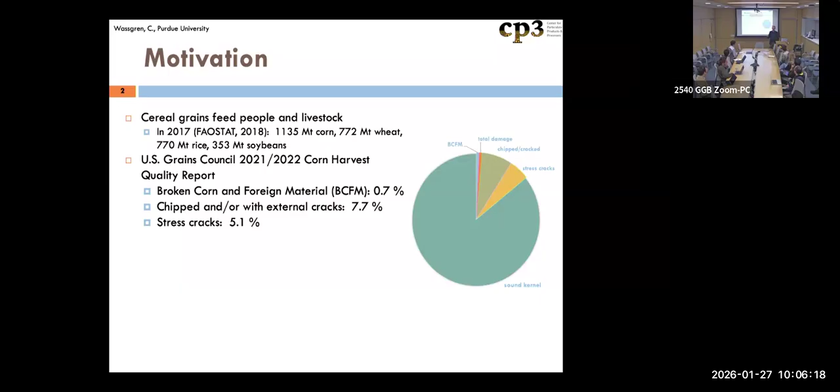I can show you a picture of that. The picture on the bottom left is this external damage, chipped or with external cracks. What you're seeing here is a dye that reacts with starch, the exposed starch of the corn kernel. Everywhere you see this blue color in the image, that's where there's some exposure to the atmosphere or to the dye. So a lot of it gets chipped or externally cracked, and then you have internal stress cracks at about 5%.

That's shown here in this image. It's a little hard to see, but the picture is backlit, and you see a change in color where these red lines encircle it - that's an internal stress crack. Over here, this is more of an XRCT image, and you see these kind of voids inside - those are also internal cracks.

When you get these internal cracks, about 15% of the material gets damaged. When you get this kind of damage, it degrades the value of the corn, affecting the price the farmer will get for that material, so they find it undesirable. It also opens up the corn to degradation - you can get microbial damage, it gets inside there and causes damage. It can also affect water absorption with the kernels, which affects downstream processing as well. So it's very undesirable to have these cracks form in the corn.

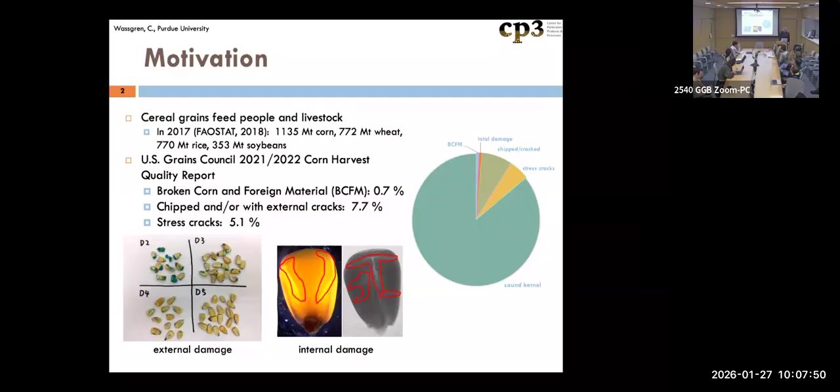So we want to try to avoid that. Now, the things that cause this kind of damage - there are several sources. One is drying: when you dry the material, the transport of moisture from inside the kernel to the outside, to be evaporated away, can cause damage to the kernels. There can also be some infestation, microbial damage that can occur.

But another source of damage is mechanical damage. As you're collecting that material during harvest, like in a combine harvester - these are multi-million-dollar devices, a dream for mechanical engineers, with all kinds of moving parts, conveyor belts, spinning blades, and things like that - they impact and compress the kernels, which can cause some damage during that harvesting process.

And then once you have the material and you're handling it later, you have all these various kinds of conveyors that can cause additional damage, like drag or flight conveyors, bucket elevators, material just free falling onto surfaces - lots of places where material can be compressed, impacted, and possibly worn. So these are the kinds of things we're interested in studying here, specifically parts inside a combine harvester, since a lot of these applications occur inside these things. So we wanted to study this problem.

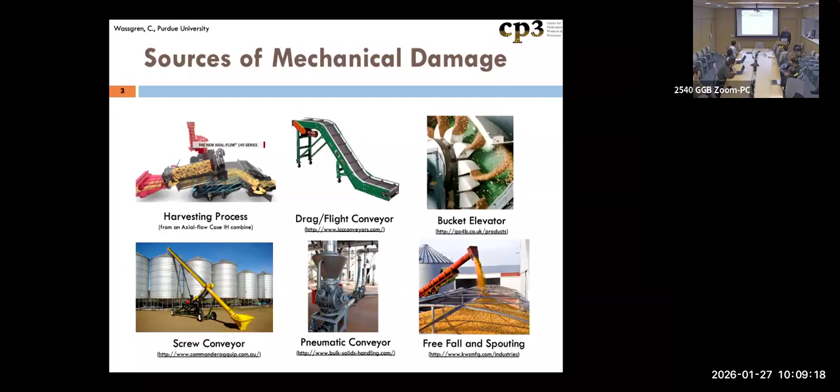We made use of the discrete element method to do this. It's very well suited for this kind of application. I think many of you know what DEM is all about.

Does anyone here not know what DEM is? Okay, nobody's going to speak up if they don't know.

I won't spend a lot of time on this, but it's a pretty straightforward modeling method in terms of the general approach. We model the movement of individual particles by finding the loads acting on each and every particle. We use Newton's second law to determine the translational and rotational accelerations on those particles, integrate that in time, make whatever predictions we're interested in within the simulation, and then repeat that process over and over again for as many particles as we can, as fast as we can. So in concept, it's relatively straightforward.

There are challenges, though. A big challenge is getting accurate models, and when I say accurate, I mean accurate enough for your application. A lot of people don't keep that in mind, but when you develop models, you really want a model that does something well enough for what you're interested in. It doesn't have to do everything for everybody, just enough for your purposes and what's considered accurate enough for your purpose.

So developing those models can involve modeling the particle shape, the size distribution, the forces involved, contact forces, whatever it is. All those things are embedded in these steps, and then you perform this as quickly as possible for as many particles as you can, typically.

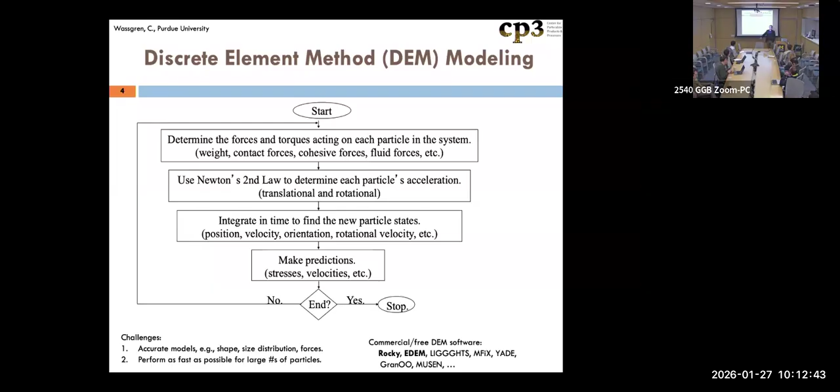So there are pros and cons, but anyway, that's the software we're using. I'll talk in the next several slides about the models we use before we get into the damage modeling aspects. The first thing to consider is what kind of particles are you going to use. We're interested in modeling corn kernels, so not spheres.

We can easily measure the general size and mass of corn kernels. Moisture content is another thing we measure. It turns out when you're dealing with biological materials, moisture content is very important, it affects all the mechanical properties of the particles, so you need to know that.

But to get the shape and size, we simply imaged a bunch of corn kernels using XRCT, X-ray computed tomography, to get a nice outline of the kernels. That way you could measure many kernels and get different shapes and sizes. We tried some 3D scanning of kernels, but didn't have much luck just trying to image the surfaces. They were too reflective, the pericarp, which is the surface of the kernel, was pretty reflective, so we got really bad images with normal 3D scanning. We tried spray painting it and all this kind of stuff, and it just didn't work.

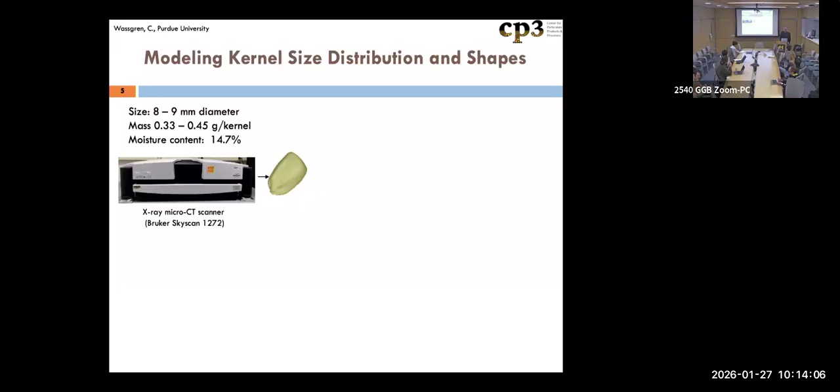And then to kind of zero in on which set of shapes we wanted, we actually just looked at the error in the volume of the actual kernels, and then we looked at the envelope volume of the bonded spheres, and we tried to keep that more or less the same. And also the shape of the sphere was kind of set by the shape of the kernel.

And we found that 4 to 5 spheres seems to minimize the error. We could go to a larger number of spheres, but it takes more computational effort. So this is an engineering trade-off, right? We do this all the time when you develop models. How complex do you want it to be? What restrictions do you have? Speed is a restriction, so we don't want to go out to 100 different spheres—it just would take too long to model big systems of those. So 4 to 5 spheres seems to be a pretty good compromise.

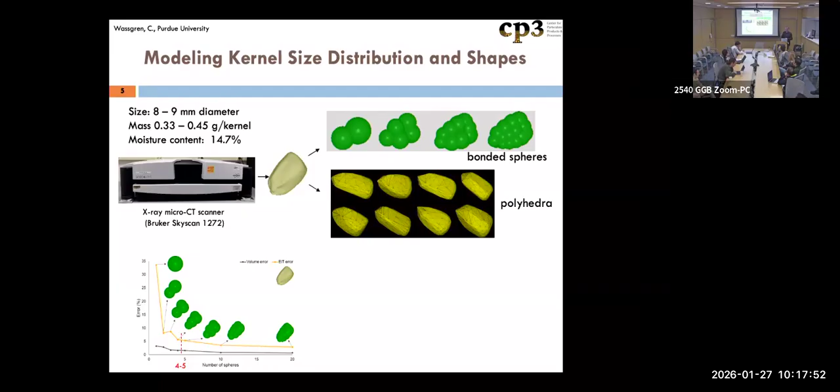But there is another approach. This is coming out of Rocky DEM. They use a lot of polyhedral shapes, and you can see some examples here. And then you have the question of how many facets do you use?

So we did the same kind of thing. We checked the volume with different numbers of facets, and we said, well, about 300 facets seems to give us 1% error in the volume. That seems pretty good. So in the simulations, we end up using on the order of 10 different representative shapes, just randomly sampled from all the images we made, and then used those in the simulation. So we had some variability in shape and size, not as much as in real life, but at least we had some range.

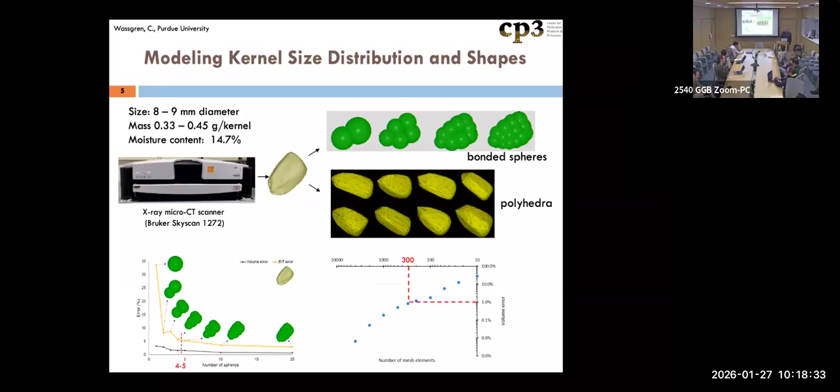So the next modeling choice is how you model the contact forces between particles. Many of you know about DEM. We don't model any real geometric deformation. Particles come into contact, and instead we let them overlap a little bit, and use that overlap to determine contact forces. So the normal contact force might be a damped spring with various complexity, and in the tangential direction you can have a damped spring with some sort of frictional sliding element. Very common way to model this.

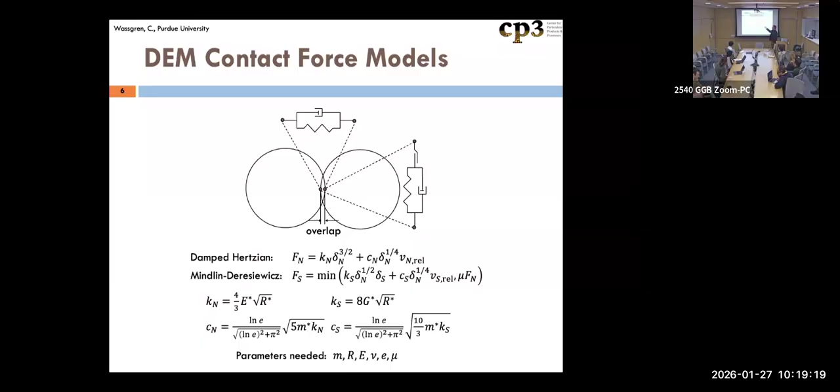As far as the details, there are many different force models available in the literature, but we stuck with a standard model. We used a damped, nonlinearly damped Hertzian spring in the normal contact direction, and a Mindlin-Deresiewicz kind of tangential force model with a damped spring and a sliding friction element. These are almost default models used in a lot of commercial DEM code.

I don't think they're the best contact models out there. They have some deficiencies. I think they became default because they were relatively easy to code and didn't require keeping history of the contact. Some better force models actually keep that history; this one does not, so it's easier to implement computationally. I had a former PhD student who went to work for one of these software developers, and he was surprised at the lack of physics knowledge a lot of programmers had, so I don't think they were implementing the best models. Nevertheless, it's a default model, and I think it has some impact on what we observe later, but in some cases it doesn't. I'll talk more about that later.

The models drive the parameters you need to measure to characterize the system. In these models you have a contact stiffness in the normal direction that involves an elastic modulus, E star, which also involves a Poisson's ratio, and a measure of the geometry of the contact, which comes from our shape representation, so we already have that. There's also an effective shear modulus that comes from the Poisson's ratio and elastic modulus. Then you have a coefficient of restitution, which is a measure of the energy dissipation in the model, and masses, which we already know. So these are the parameters you need to calibrate or measure to get an accurate representation of what you're dealing with.

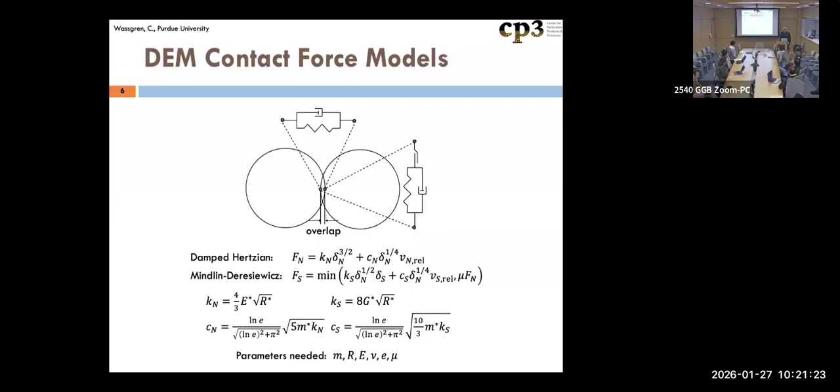So I'll spend some time talking about how we got those parameters. They're interesting because we're dealing with biological materials that have irregular shapes, so it can be challenging to get some of these parameters. First, let me talk about contact stiffness.

If you know something about DEM, you know contact stiffness really affects the speed of your simulation. You can get this idea from a simple spring mass system: a mass hits the surface and rebounds. If you look at the acceleration or force acting on that particle, it increases, reaches its maximum overlap, and then separates. So there's a time of contact, and that time is proportional to the square root of the stiffness and mass of the contact.

Actually it's flipped upside down from that—it should be mass over the stiffness. So if you're dealing with small masses and large stiffnesses, you have short contact times, and your explicit time integration algorithm needs to be a fraction of that contact duration. You want to integrate under this curve, since it's the acceleration, to get velocity and then position. So you need a fairly small integration time step for accurate integration. Basically what you want to avoid is having very stiff contacts.

If you have stiff contacts, the simulations take a long time to run. So you'll see a lot of people artificially choose stiffnesses that are really soft to make their simulations run fast, and that's actually pretty acceptable. If you do parametric studies of many systems, unless you make the particles super soft, it has very little impact on the simulations. But in some cases it is important, and I'll talk more about that later.

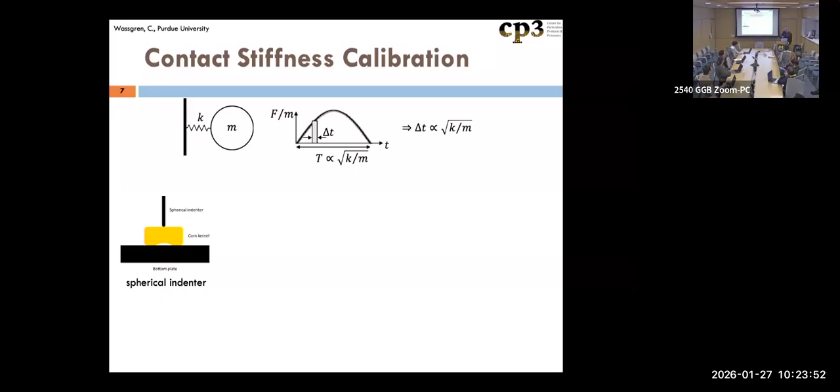It's biological. So you have the germ on one part of it, you've got the pericarp. Your elastic modulus varies over the surface, and we can't really account for that variability in the simulations. So we abandoned that relatively quickly.

Instead, using a multi-sphere approach, you could assign different properties to each particle. If it was your own code, you could do that sort of thing. But then there comes these questions of trade-off.

So you spend a lot of time getting that part just right, but your shape is super bumpy, with those spheres. So is it worthwhile to spend a lot of time increasing the accuracy of one little part when the rest is really pretty approximate? But it's interesting if you're choosing to do multi-sphere anyway.

Yeah, so that you could do that, then you could assign different properties, which is something I hadn't thought about before, but you could certainly do that. I think that then allows you to do not just shape but heterogeneous DEMs. Again, you probably do that in code, not in commercial code.

But yeah, the other thing to consider - this is Karl up in Midland - is the fact that the corn kernels across an individual cob are not uniform. You have a lot that are, if you looked at them in cross section, rectangular in shape. But as you get to the tapered end of the cob, you have what is in the industry called rounds, and you have a lot of rounds.

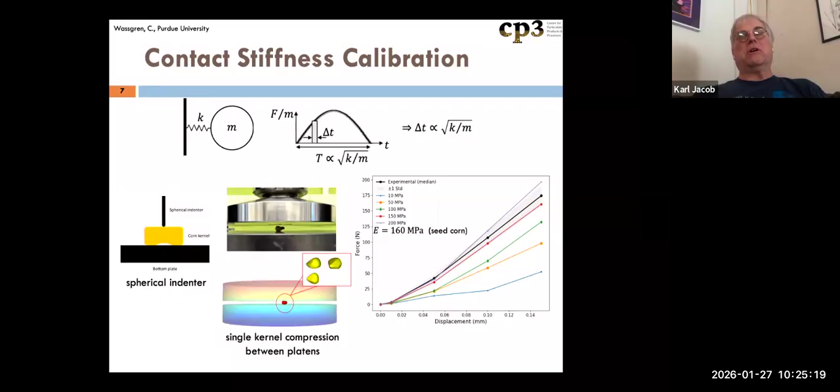So there's more non-homogeneity in particle shape than we give credit for in an ear of corn. Yeah, that's exactly right. If you just take a look at an ear of corn, there's huge variation in size and shape as you go from the tip or the base to the middle.

We tended to, when we did the experiments, stick with the material more in the middle of the cob rather than at the ends, to try to make it a little bit more homogeneous and a little bit easier to work with. So the two ways that we used to characterize stiffness, rather than the spherical indenter way, was...

One was just a calibration approach. We just took individual corn kernels - this was actually seed corn, so it looks a little bit different than yellow dent corn. Seed corn is used for planting corn. But anyway, between two flat platens, we would squeeze it a little bit experimentally and look at the force displacement curve.

So you can see here, force displacement, that's the black line, was just one - this is the median of many, like something like 100 different trials. The band here is just a plus or minus one standard deviation from those. And then we simulated the same thing with their different shapes and varied the elastic modulus until they matched.

So the different curves here are varying elastic moduli values. Something on the order of about 160 megapascals for seed corn seemed to work pretty well. So it's a calibration process rather than a measurement process, because the profile you get here depends on the shape that you use. We just wanted to calibrate a stiffness for the shapes that we're dealing with.

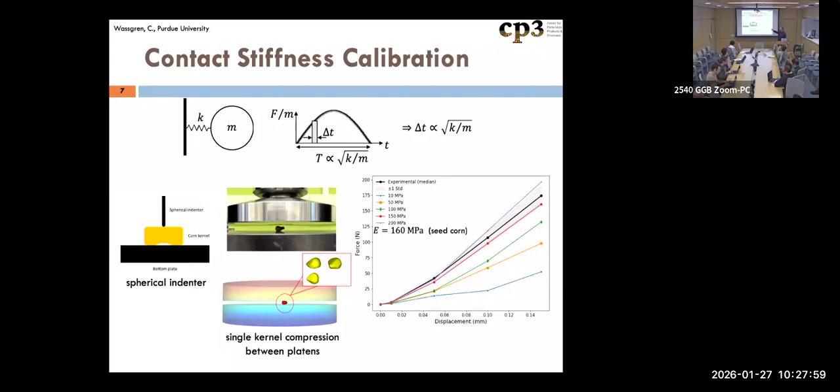I mentioned this is seed corn because we also did yellow dent corn, and that behaved a little differently. So I'll show you an example of what we did for that.

Here we did another calibration approach, but it was a bulk compression test. We took the real corn, multiple kernels in a cylinder, and compressed the bulk, getting a force displacement curve, and then we got a bulk stiffness from that measurement.

We simulated the same thing, varied the elastic moduli values until we got something that matched pretty well. The red dot dash line is the experimental mean, the dashed blue lines are 95% confidence intervals, and the symbols are different simulations we did. We found that something like about 220 megapascals for yellow dent corn seemed to work pretty well at matching the experimental work.

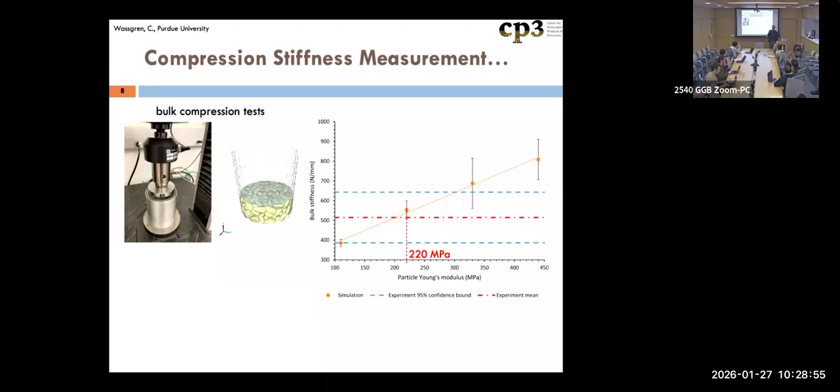So this is a calibration, not a direct measurement of elastic modulus. It's a calibration for our size and shape of kernels. I should also mention that we measured the friction coefficient beforehand and used that measured value, so this is a calibration for those conditions to give us a matching stiffness.

Do you use any damping? Yes, I'll talk about that in a moment. The damping doesn't play as much of a role here because this is just a quasi-static kind of system. Friction is more important there.

It's kind of what I was talking with you about. The particles rearrange and then get into more stable positions, and then you get very repeatable compression cycles. But until they rearrange and become stable, it varies all over the place.

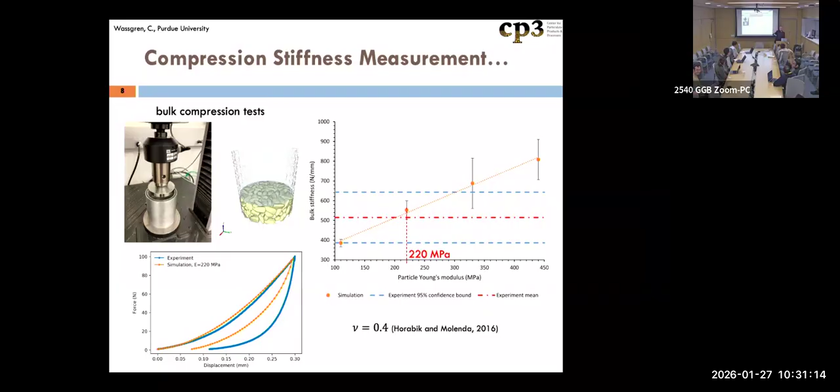So let me talk a bit about the friction coefficient measurements now. We now have the shape, size, elastic contact stiffness. I'm going to talk about friction and coefficient of restitution - those are the remaining two parameters.

If you look through the literature, there are lots of different ways people have proposed for measuring friction coefficients, many of them bulk level tests. The problem with what I've seen in the literature for getting friction coefficients for grain is they incorporate some of the shape effects as well - so you maybe have a bunch of corn kernels glued to a surface, and another surface with corn kernels, and you tilt it until it slides, getting a friction coefficient. But there are some shape effects in there rather than just the friction coefficient by itself.

So I have a colleague who does a lot of tribology related work, and he has this pin on disc tribometer that I thought would be a neat thing to try to get individual friction coefficients between a corn kernel and a surface, and between two corn kernels. The way this works, it's a little tough to see.

There's a vertical component here. It's a sample holder, and we have a little 3D printed holder that we glued a corn kernel to. And this measures the vertical displacement and vertical load.

And then on the bottom, there's this disc, and you can mount whatever surface material you're interested in here, or actually glue another corn kernel onto that bottom. And that rotates, so it kind of reciprocates, and you can measure the displacement torque on that. It's a very sensitive device.

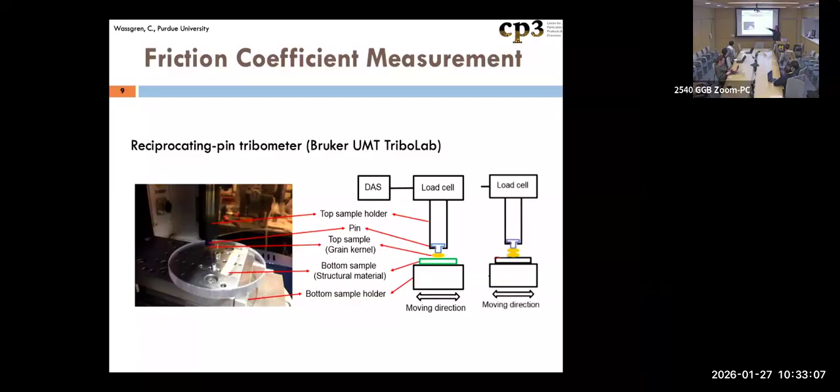So we did two kinds of tests, one with a corn kernel and the surface, steel basically. We also did acrylic surfaces, and then two corn kernels themselves. And this is the kind of data you get.

So the left-hand side is the measured friction coefficient from the normal and tangential loads versus time, which is effectively displacement, so it's oscillatory. And you get these kind of profiles where you get like a static friction coefficient, and then a dynamic value, and then it changes direction.

And so actually the data here is for wheat and acrylic, but we did the same kind of test for corn and steel. Looks very similar, I just didn't have a picture of it.

Is there a velocity dependence? We didn't check that. These are all pretty slow velocities, but the machine had some limitations in how fast you could do those oscillations, so we did not check that.

I was a little concerned also because the shape of the corn kernel, at least for kernel testing, they're not flat surfaces. So what happens is as one kernel goes over the other, the vertical holder goes up and down. And so we took that into account for the kernel friction coefficient.

So you can account, knowing the vertical and tangential displacement, you can get the local slope and then find out what the component of the friction coefficient would be for that. So we included that. If you went too fast, you might get some inertia that would skip it up and bounce, so we tried to keep it relatively slow.

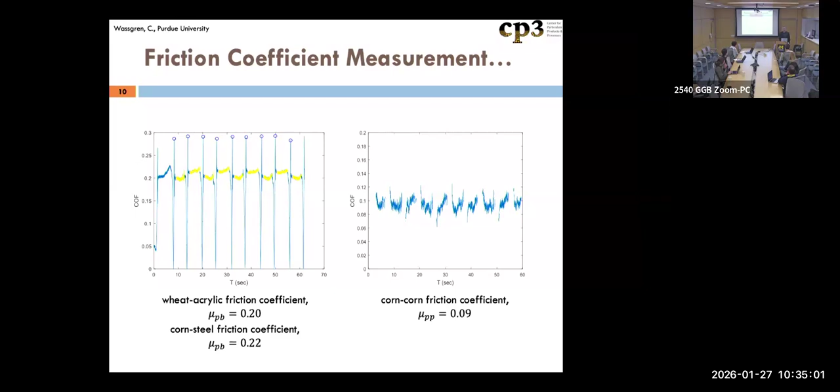So the remaining parameter that we needed to obtain was coefficient of restitution. Now, the standard approach that a lot of people take or think about in physics with coefficient of restitution is you drop a sphere, it bounces, you measure the height you dropped it from, the rebound height, and from that ratio you can get the coefficient of restitution.

And that works great as long as that sphere bounces exactly down and straight back up vertically, no rotation, doesn't bounce horizontal. But you can't do that kind of test with a corn kernel. If you drop it, it'll hit and then go fly off to the side and spin. So some of the energy doesn't just go into the vertical rebound, it goes into some translational movement as well as some rotational elements. So many people in the literature just use the rebound height and make a coefficient of restitution out of that. It's just not right.

So we couldn't think of a good way to actually measure it directly, so we calibrated the value. And the way we did that, for a kernel surface interaction, was this really crude, simple experiment where we would drop individual corn kernels onto a boundary surface and they would bounce and land into a bin. We did this experimentally.

And then we do the same in our simulations using our contact stiffness, our shape, and our friction coefficient. So then we would calibrate our coefficient of restitution for those conditions, and repeated this with different coefficient of restitution values until we got a good match with the experiments. And that's what you see here.

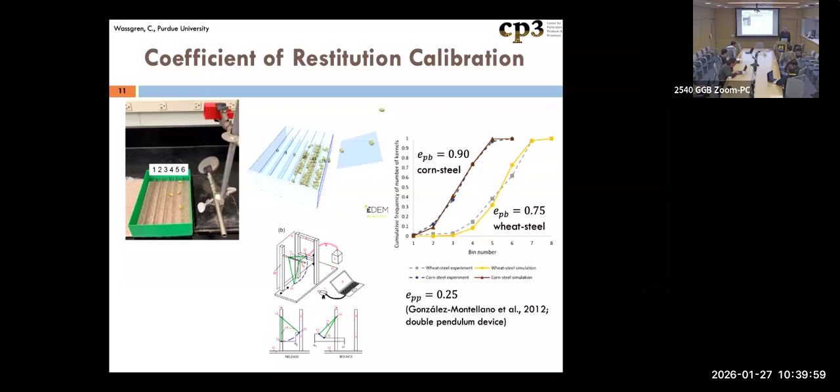So now that we have these parameters, we want to see, do they reasonably model a bulk system? We did some very simple tests - I won't get into too much detail. These are agricultural tests, like bulk density measurements, where you discharge into a cup and sweep it until you get the mass and volume, and measure the bulk density from that. It's really a measure of the shape, how accurately you've done the shape and friction coefficient, and maybe the coefficient of restitution to a small degree. We got pretty good comparisons with that.

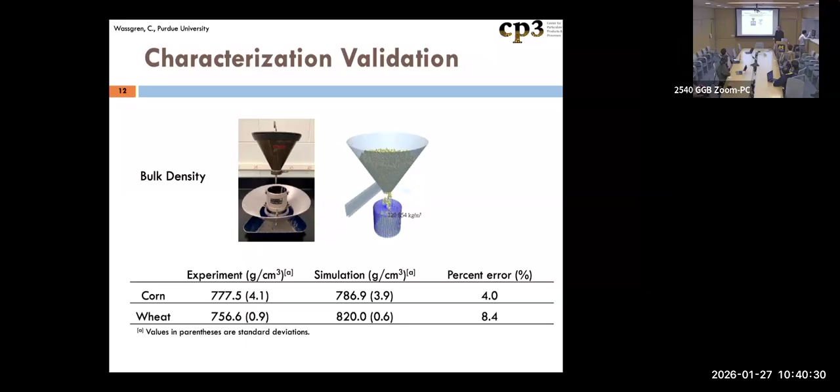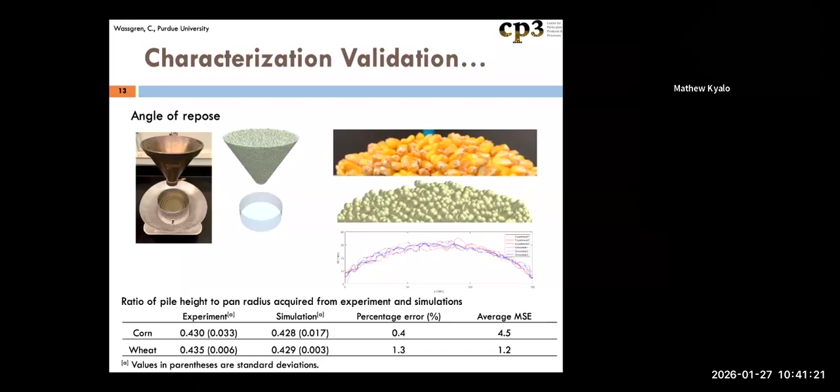Hello? So it's not - hello? Yes, sorry, I don't think this lab is the host. Hello? If you're in the audience online, could you go ahead and mute yourself, please? So the distraction, it's kind of hard to follow what's going on.

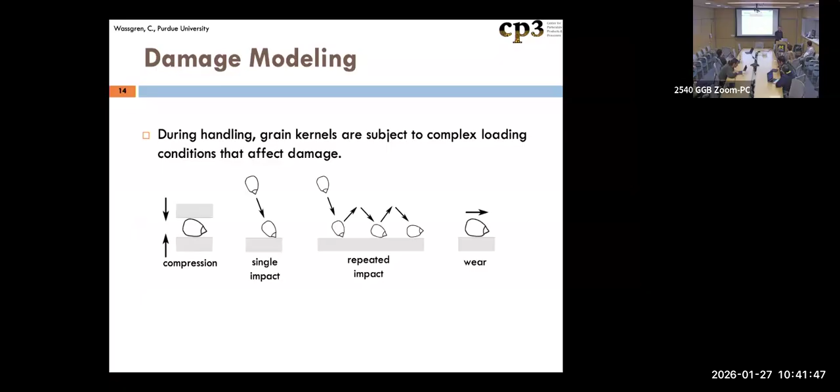Okay, so now that we have a DEM code to take a look at the dynamics of the system, we wanted to do some damage modeling. There are different types of damage that can occur - compression of kernels, impacts, whether single or multiple, and then wear. So these are the kinds of damage we looked at, and we had different tests to quantify the strength of kernels subject to these kinds of damage.

So simple compression testing of individual kernels. We did some impact testing - this is a rotary impact tester where you drop kernels one at a time. There's a blade that spins around at a certain speed. You can get the impact energy for a given kernel when it hits it, and then you collect those at the bottom and look at the damage.

And then we did some pin-on-disk wear studies of kernels. What we found is that the wear was just negligible. You didn't really get much wear on corn kernels in particular, so we just didn't continue with that. Most of the damage occurred through compression and impact.

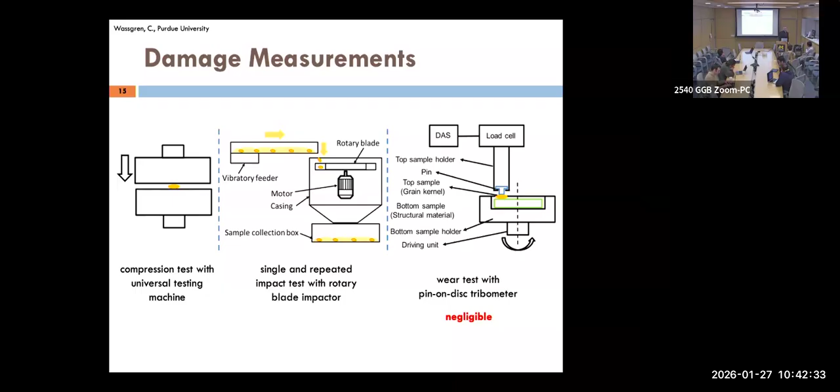So the way we model that kind of damage is using a damage probability function, both for compression and impact damage. The idea is this: you start with the experimental measurement, like a fracture force for the compression. You measure 100 different kernels and what their fracture forces are, and produce a cumulative distribution of that. That's what this jagged red line is, the experimental distribution of the fracture force.

Then we fit a curve to that. In this case, a log normal distribution seems to do a pretty good job of describing those fracture failure forces. And then what we do at the start of the simulation, we have maybe 10,000 kernels.

We assign a fracture force by choosing a probability between 0 and 1 for each kernel. Let's say for one kernel, our random number comes out to be 0.6. Then we say, okay, that kernel's fracture force is now 320 newtons. Then you go on to the next one, give it a random number, maybe 0.2, and that one's about 200 newtons. So every kernel has its own fracture force, and when you look at the distribution of fracture forces in the simulation, they correspond to the experimental distribution.

And we can do the same sort of thing with impact damage. So then in the simulation, as you run along, we calculate the damage parameter. In this case, we look at what the compression force is on the kernels, compare it to our threshold for that particular kernel. If we exceed it, then it's damaged. If we don't exceed it, it's undamaged.

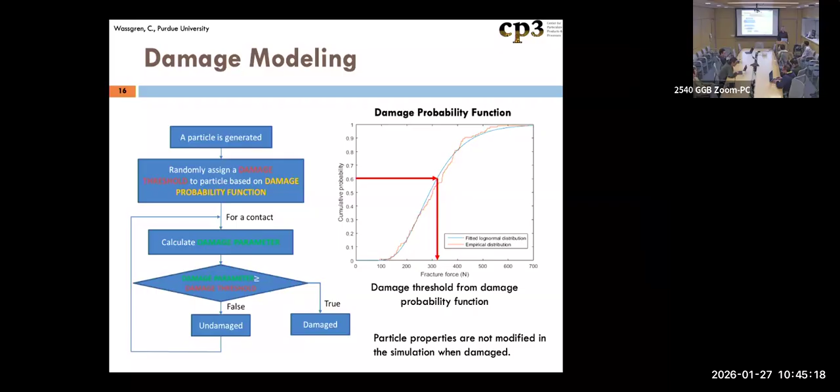For the compression damage, we looked at two models for determining whether or not a kernel was damaged through compression. One was, we just looked at the maximum force acting on that individual kernel at a given time step, and if that exceeds the experimental compression force, then it's damaged. The other approach is a little more solid mechanics, using a Mises yield criterion kind of approach, where we looked at the maximum equivalent stress during the contact. We calculate the volume averaged internal stress for a kernel, then use that to calculate a Mises equivalent stress, and compare that to some experimental values, which we'll talk about in a moment.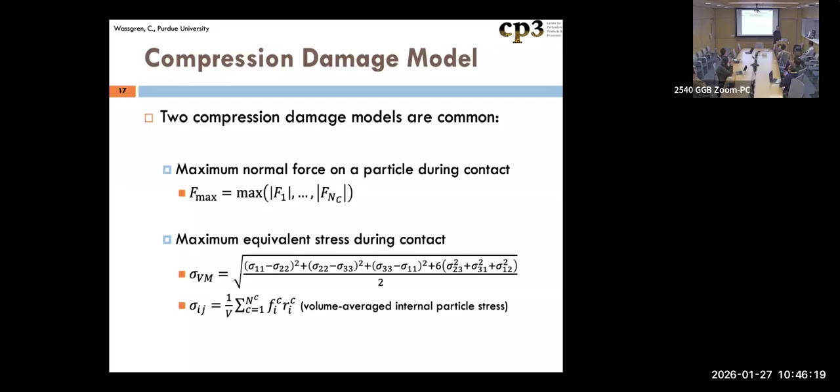So again, compression damage, I already described the procedure for that. One little note: when you compress these kernels, they don't just suddenly fragment and lose all strength, so we always used the first peak. What will happen is they'll get an internal crack, and then they'll actually gain maybe a little bit more strength, and then fragment later.

One interesting side note on this is we actually built an optical compression punch. Instead of metallic platens, we changed the upper platen, well, both platens, to be sapphire windows. The upper platen had a light, an LED. The bottom platen, we put a mirror under it, and then used an iPhone to videotape. So we had light transmitted through an individual kernel, and we got a video of that and recorded the sound simultaneously, so you could see internal cracks develop while you're compressing it. Interestingly, you don't always hear the crack, but you can see it in the video, a crack forming, and then they get longer, and then when it fragments and really breaks, then you can hear the crack. So that's kind of an interesting technique.

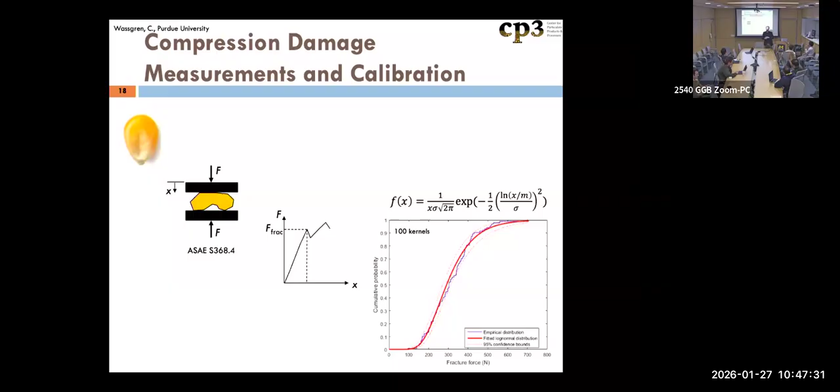For the Mises stress calculation, we calibrated the failure Mises stress in the following way. We took our kernels and put them in that bulk compression device, looked at the kernels beforehand to make sure there was no obvious damage, then compressed it to a particular load so we could get the average stress in the whole assembly.

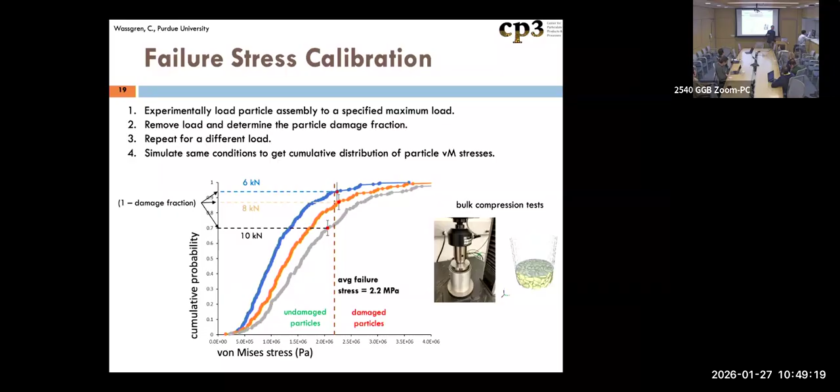This is the distribution of internal Mises stresses. Then we did the experiments and got, for the same applied loads, the average stress at which damage occurred to reach a certain damage fraction. For different loads, we get about the same Mises stress at which damage occurs. Kernels on the higher Mises stress side would be considered damaged, and those on the other side undamaged. So we calibrated that threshold.

We validated it using what's called a Victoria mill. These are old agricultural devices people commonly use—you feed in kernels and they go through a kind of screw that really compresses the material. We did simulations and experiments with nominally undamaged kernels and looked at the amount of damage when they came out, then tried to compare.

How's that contact done with the screw?

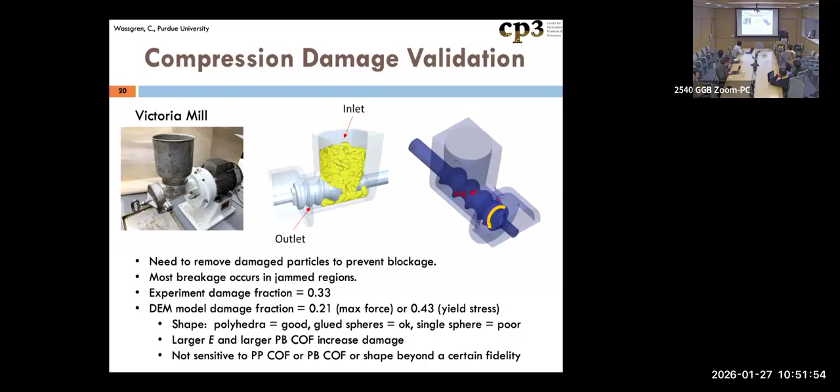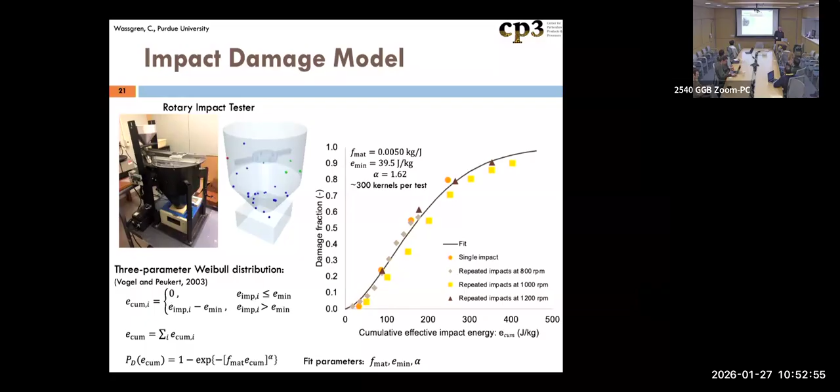The way this model works is you start the simulation by assigning a damage effective cumulative impact energy for each particle from that experimental distribution. Then as the simulation occurs, that kernel might impact multiple times, and you track the amount of cumulative specific energy for that particular kernel.

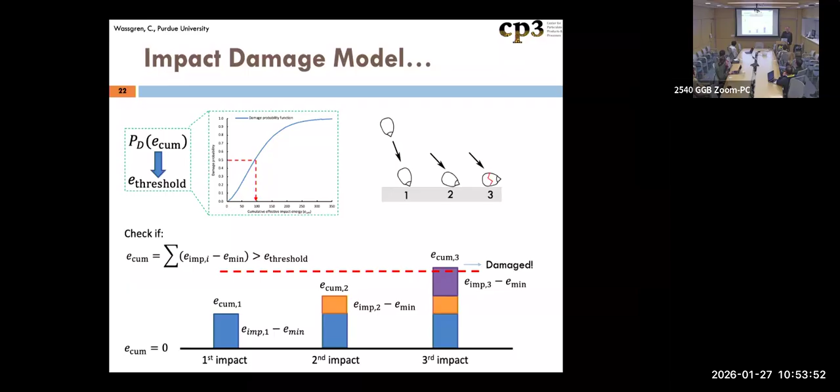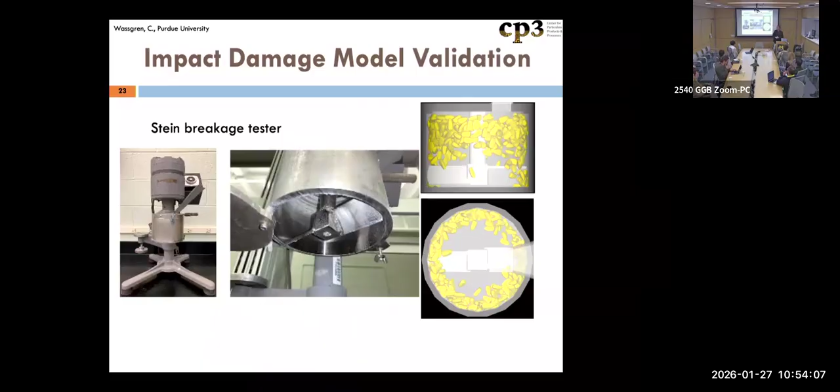We did a validation simulation using one of these agricultural devices called a Stein breakage tester. It's a high-speed spinning blade that lifts the particles into the air and beats the heck out of them. We ran those simulations and the experiments and looked at the damage fraction.

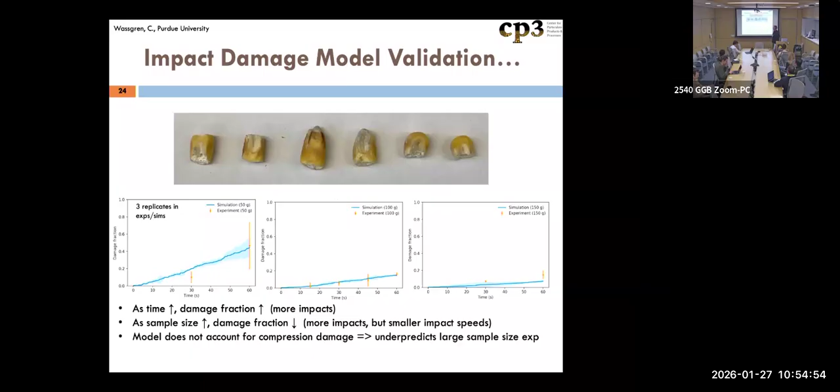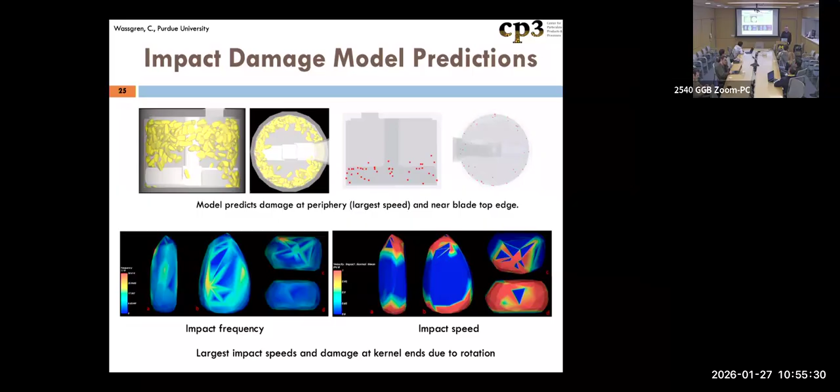When we did spheres, we didn't see nearly as much breakage. What happens with the kernels is that because of their oblong shape, they get a large rotational component, and when they rotate quickly you can get a very large impact speed at the tips—that seems to correspond to where the breakage is occurring.

We also did parametric studies on that. The elastic modulus had very little influence on the dynamics and damage.

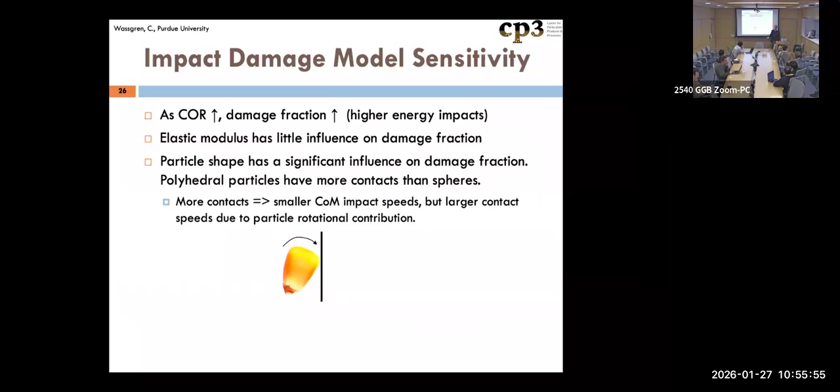Let me talk a little about the grand use of all this. We did the characterization of the corn and the characterization of the damage modeling—now let's put it into practice.

This is a model of part of a combine harvester—it's a rethresher device that helps separate materials and conveys them along at the same time. We had a big experiment where material was conveyed up into a feed hopper, then screw conveyed through this rethresher device, which is a series of three counter-rotating impellers that lift the material up and out.

We sampled the material coming into the feed hopper and sampled it leaving the rethresher, so we knew how much damage was going in and how much damage was coming out, allowing us to look at the change in damage. We did that experimentally and also predicted it from our models in the computations.

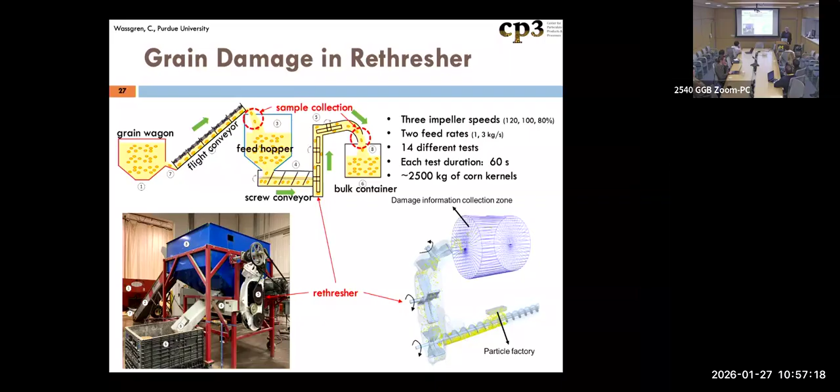And we did this for a variety of conditions. By the way, this was a huge amount of material, like 2,500 kilograms of corn kernels. These big experiments not only require a lot of capital in the equipment, but you also have to pay for a lot of material at the same time. Fortunately, being in an agricultural state, we can get corn like it's nothing, but it's still a lot of material.

So we ran many different trials with different feed rates and different rethresher speeds, and the results are here. It's a little hard to see, but the experimental data is the blue curves. This is the damage fraction of material for all these different tests. The orange here is from our simulation using our calibrated coefficient of restitution, and we don't get a great match. It overpredicts how much damage we have in the simulation. What we ended up doing is artificially dropping the coefficient of restitution down to 0.55, and we got a pretty good match at that point.

What we realized is the coefficient of restitution is not actually a fixed property of the material, but it actually decreases with higher impact speeds. People have shown this many times experimentally, especially for viscoelastic materials like corn kernels, where you get a drop off in the coefficient of restitution with speed. So that's our explanation for what's going on here - our measured coefficient of restitution was for a relatively low impact speed, and these tests are at much higher impact speeds, so we would effectively have a smaller coefficient of restitution.

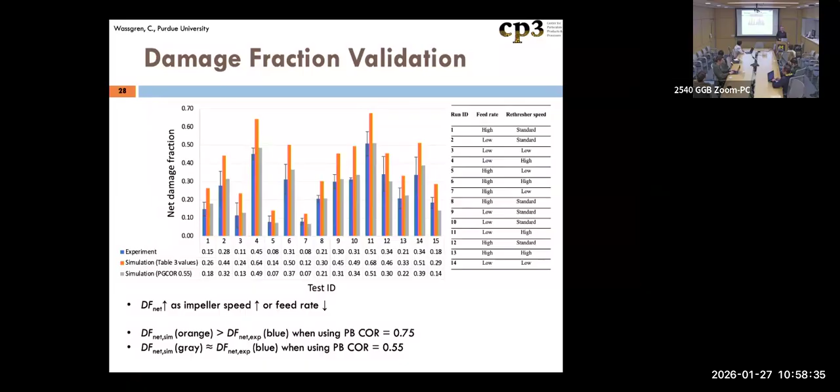We can also look at where the damage is occurring in the device - that's where all these red dots are on this field plot. A lot of the damage is occurring between the first two impellers, as well as between the impeller and the casing. It makes sense when you think about how these things spin around: the bottom impeller throws the material off and up to the right, and it hits this high-speed impeller coming the other way. So you get really large impact speeds here, as well as with the casing. That's where most of the damage seems to occur.

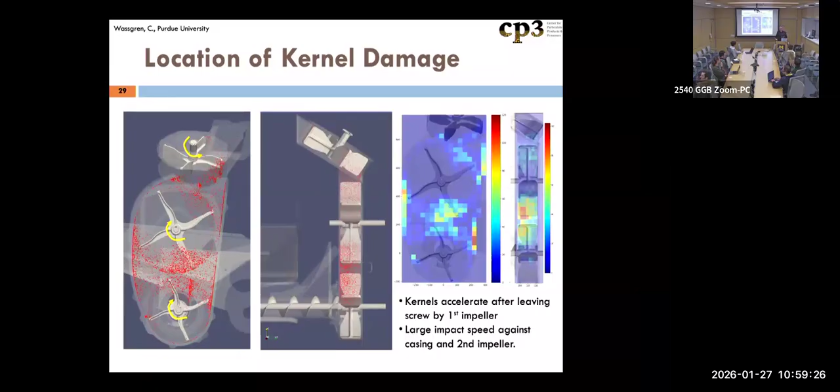The company actually redesigned their rethresher based on this simulation. They wouldn't tell me how they redesigned it, but they made a change to minimize the damage. So it's satisfying to know that some of our work contributed to that.

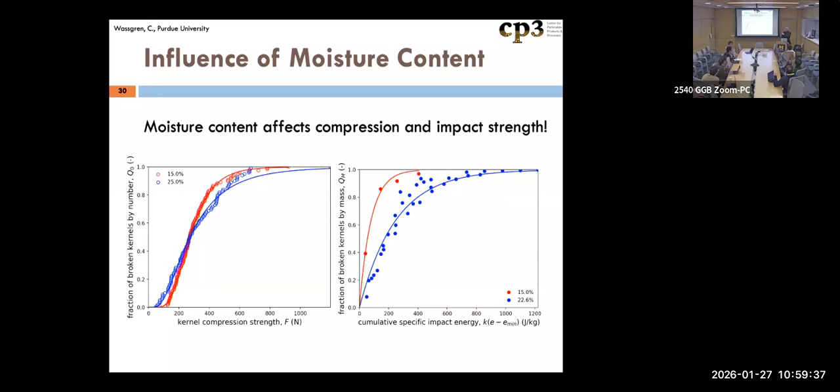All right, so we are going to get kicked out, so I'm just going to show you pictures. We can also look at effects of moisture content - it makes a big difference in the damage models.

How do you model things that aren't just kernels? They call it material other than grain, or MOG. When you harvest, you're taking in the stalks, the leaves, the husks, the cobs - all that stuff going around. They act somewhat like cushions. How do you model all that stuff? This is coming out of the literature, and it can get complicated. Again, you want fast simulations, so this is tough.

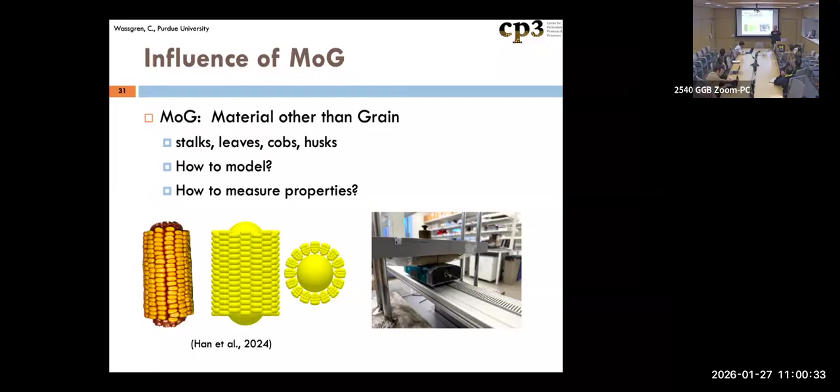How do you measure the properties? Here was an experiment where we measured the properties of corn cobs rubbing against one another. Interestingly, corn cobs have a little rough surface - if you take the kernels off, those are called bees' wings, the little bits that stand up. So you get a different friction coefficient if you do it lightly than if you compress hard, because the bees' wings collapse down. And if you rub it once and come back again, you get a different friction coefficient because now they've all laid down. So getting properties is really challenging.

I'll go ahead and end it there because I'm out of time, but DEM works pretty well for this stuff. It's a great application, but there are some really interesting challenges with it, and there's a lot to do. So thank you, I'll go ahead and end it there.